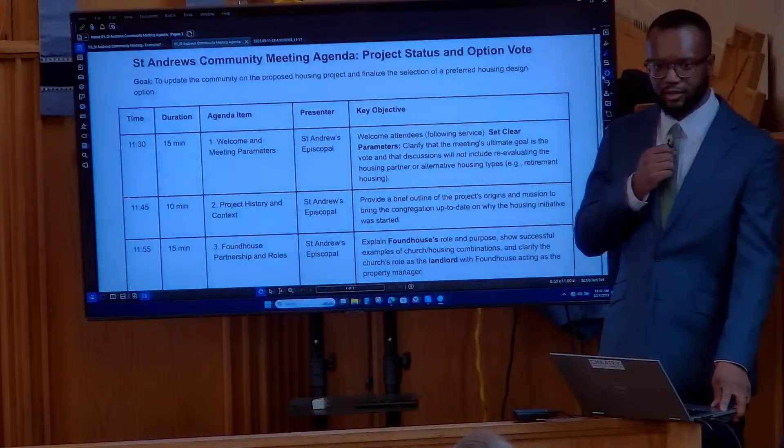So we won't go too much into detail on the buildings. If we want to talk pros and cons, I do have that list in a presentation format, so we can discuss that. But that's what we're trying to do here, drive this to a decision.

The next part of the agenda - it was really helpful when we discussed this with the vestry, and had a couple of people come visit who had some pretty significant questions. One thing that really helped was having a sense of the history of the project, because a lot went into it. About 3 or 4 years of work went into it before it even came to us.

So I'm just going to hit some of the highlights, you can read along. Many of you will remember that in 2014 the church tried to start a building project with DNK Architects. If you go into the library, you can still see the results - renderings of what the church was supposed to look like from that time. We also undertook a $300,000 capital campaign, which was supposed to be matched by the Diocese of Southern Ohio.

When I came to the church in 2019, during COVID, nobody else was here. I just came to the building because I'd never been here before. We had the graphic of a thermometer for the building campaign, and out of $300,000, I think it was at 28 or 29 thousand. Then COVID hit, so I thought, well, when we come back from being out from COVID, we don't need to see that.

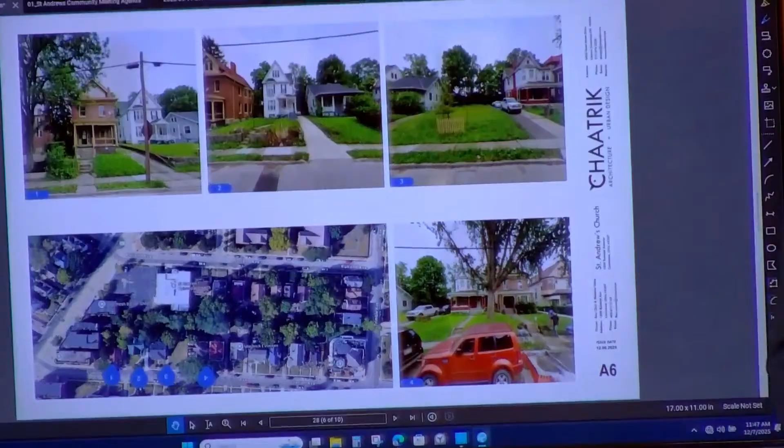In April 2025, Chaatrik gave us the renderings that you've seen in your papers. These are very basic renderings, and LeStavion is going to show you examples of what a more shovel-ready thing would look like. So if you look at them and think, that's not quite what I had in mind—no, we just want you to know it's going to get more detailed and evolve, so it won't look exactly like this. This is just to give us an idea of what a 2-building or 1-building build will look like.

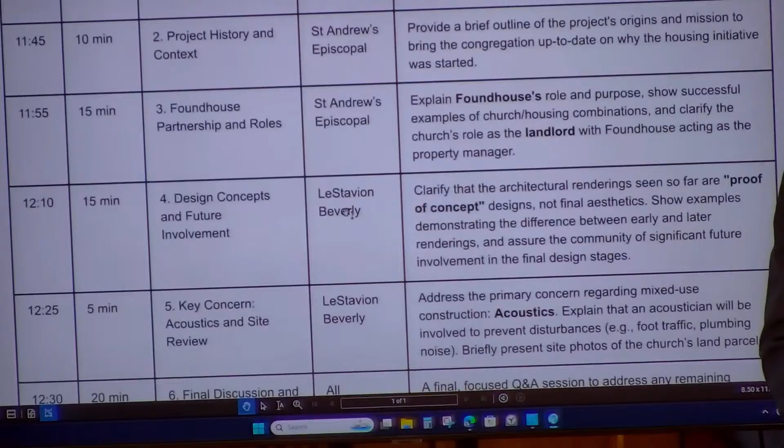I think it's also important to mention that Foundhouse is pretty respected by the city and the interfaith community for doing this. As Father Chris said earlier, they focus on really getting people out of homelessness. So any families going through issues, they work with them to find housing. I believe the data I looked at showed about an 82% rate of getting people out of temporary housing into permanent housing through their different programs. They have other programs as well to help people develop whatever they need to get permanent housing.

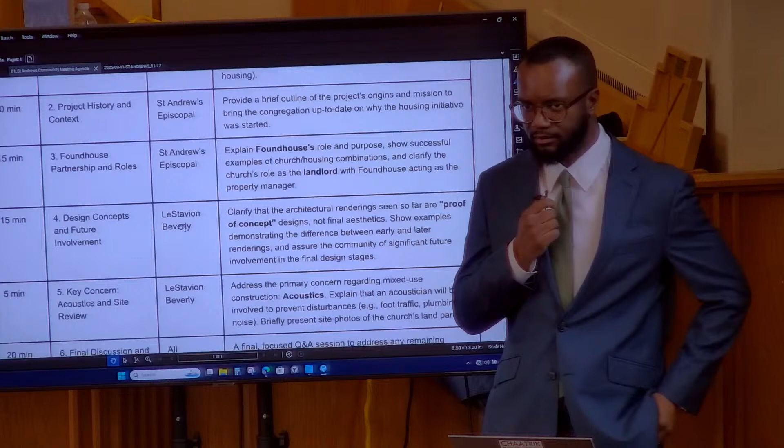Yeah, so they have wraparound services. Things that we do, like our Justice Hub and our after-school program, will fit great into that - we'll have kids living here who need those kinds of programs. So we're actually preparing the way for this new life that we're going into already.

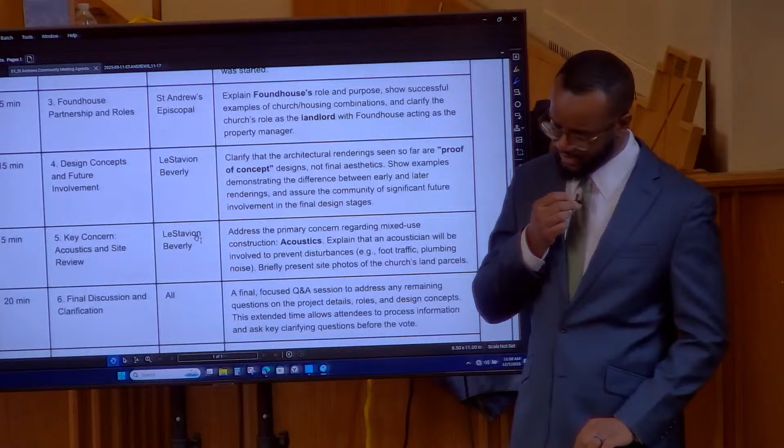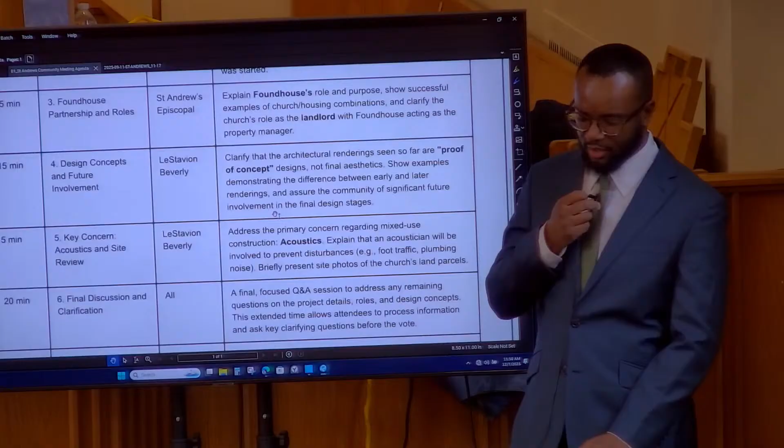As Father Chris said earlier, what we showed before were really proof of concepts. I didn't actually put the examples of renderings in here, but in this case we rendered a little early just so you guys could see proof of concept - that we could have a church and a building as one building, and it can still feel like a church, not like an apartment building or some commercial structure.

But as we develop the design, that's going to change. Currently we're in what's called a pre-design programming phase, where we're trying to understand the needs, get those needs on paper, see how big of a building that's going to require, and then from there start layering in a lot of the other details - what type of mechanical systems we're going to need, what the actual exterior material will be, what it's going to look like on the inside.

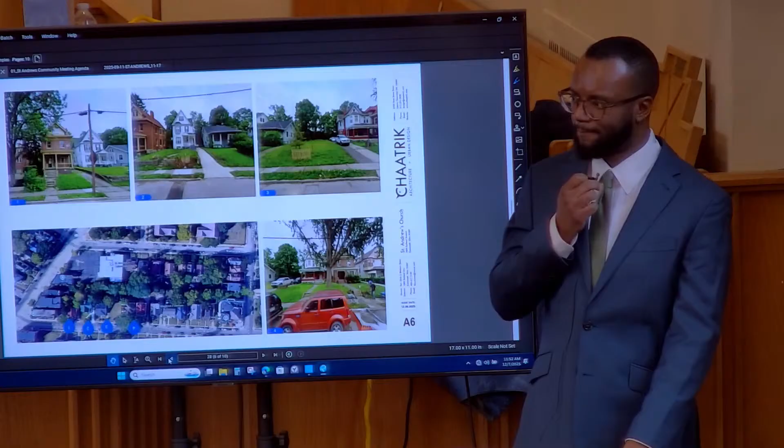In order to get to that next stage, as I was saying earlier, the real first step is to make sure we have full buy-in and approval from Cincinnati's Community Development Zoning Department. That's really the big hurdle we're trying to get past now. Once we get through that piece is really when we'll design more touch points with you all into the process, so you're engaged and don't feel like we're moving ahead without you or making decisions without you.

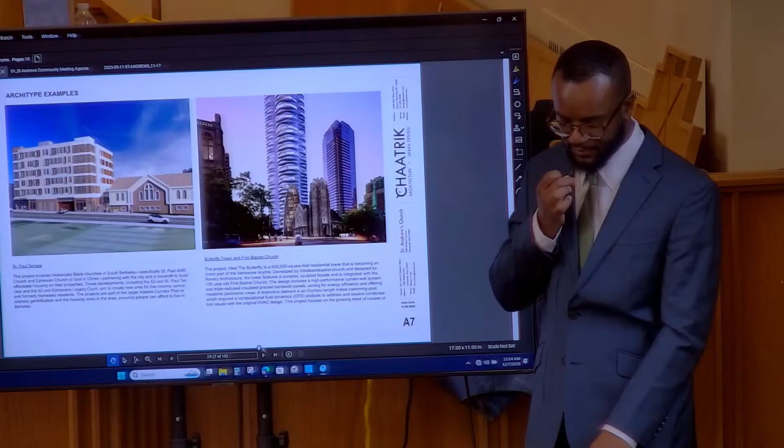A few others—there's a group called the Damascus International Fellowship who have been working with different universities, developing projects along the same idea, experimenting in colleges. So this is one of the students' projects.

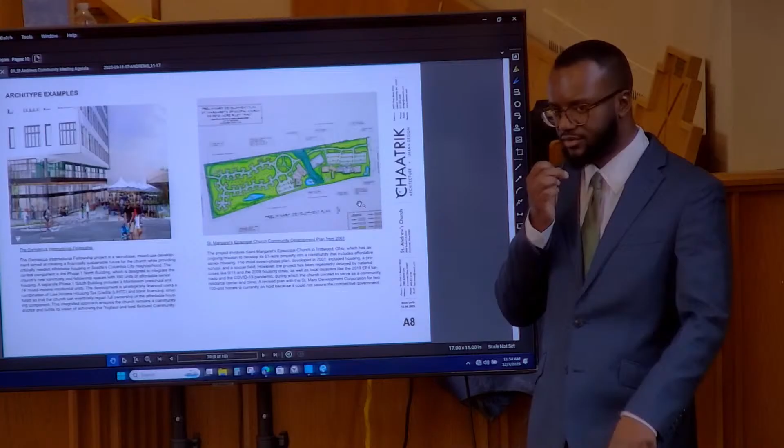And then there's a church—this is St. Margaret's Episcopal in Trotwood, Ohio. Back in 2001, they were looking to build a lot of senior housing on their property, and this was the plan for their development.

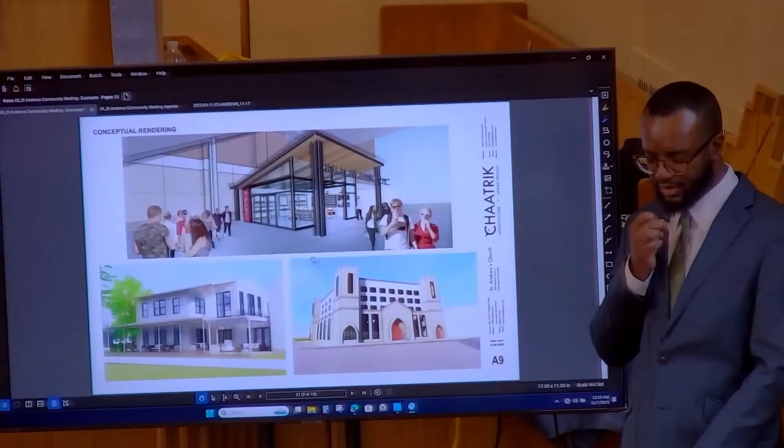So a lot of folks are really looking into this, and these are examples of renderings. This is all conceptual—hey, we don't exactly know what we're going to do yet, but here's an idea. But toward the end you can expect things that start to look a lot more photoreal, like the renderings of what we've done for hotels and homes.

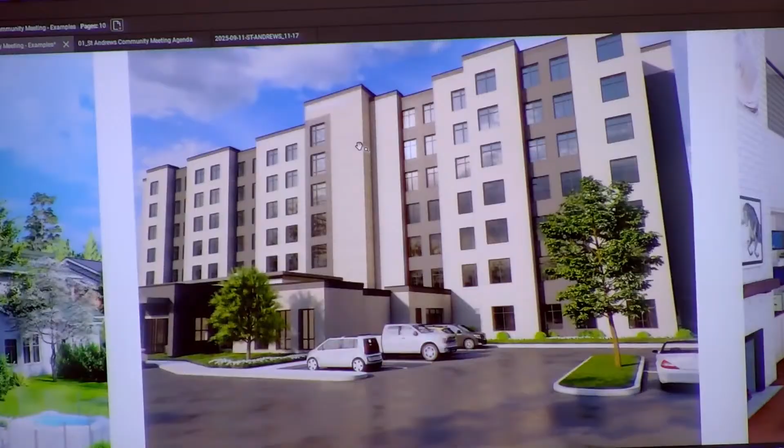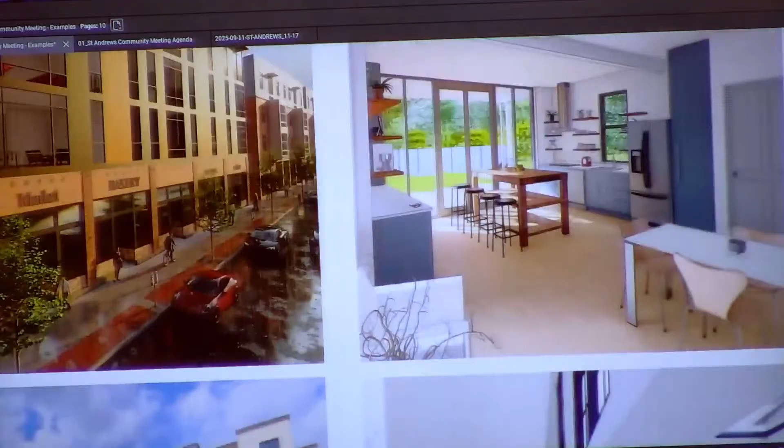I'm going to zoom in so you guys can see them—more hotels. These are all different projects that we've designed and rendered. When you start to see things that look like this is when you'll know we're really getting closer to the finish line.

So before I move on, are there any questions about the concept or where we are in the design process right now? Yes, you in the back first, ma'am. Hi, I'm Ann. Hi, nice to meet you.

So is there—affordability-wise, which way is it cheaper to build, two buildings or one? Which way is more sustainable financially, where does it become more energy efficient, two buildings or one? So one building will be more energy efficient.

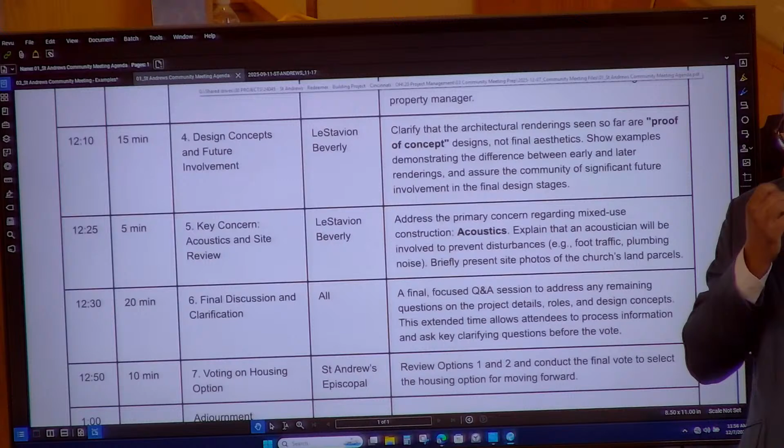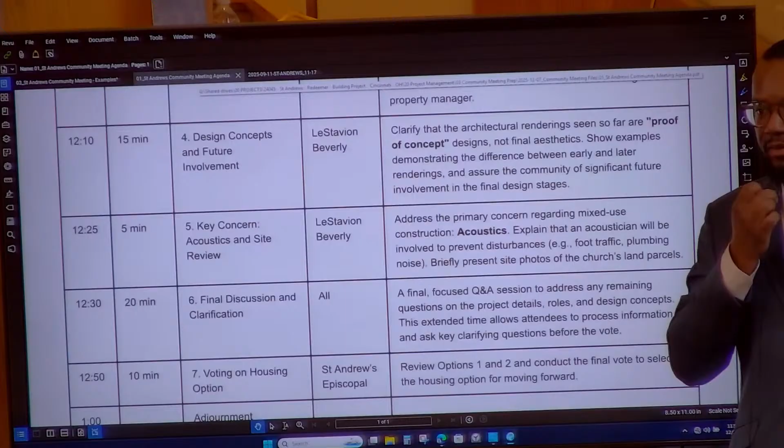Model Group actually did a preliminary cost analysis of this, and they said you'd save about 5% of your budget if you go with one building, which for a project of this scale is around $1.5 million. So the number I gave was the savings amount—about 5%.

So in terms of efficiency, one building is the way to go because you can more centralize utilities. You can have a smaller envelope, so exterior walls cost money, and making sure they're insulated costs money. If you have two buildings, you've got a lot more wall to build. So one structure is a lot more efficient.

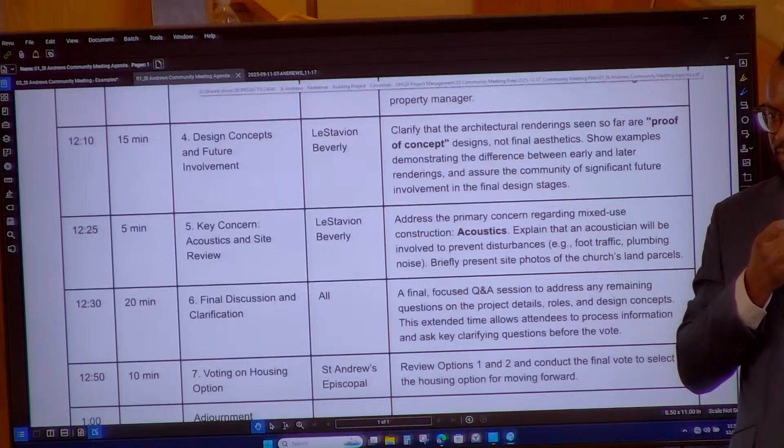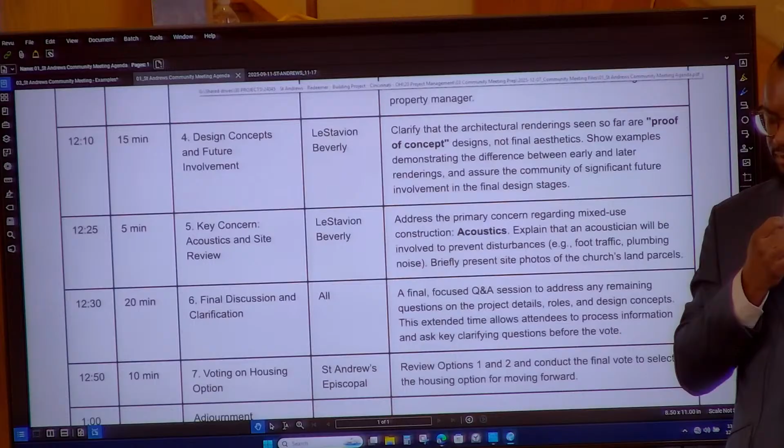Yes, was that you, sir? Yeah, I wanted to know what information you had about the scope of possibilities for the occupants of the housing and the users of the church facility—in other words, how many people would live in the housing, and how many would the church facility accommodate at 10 o'clock on Sunday morning?

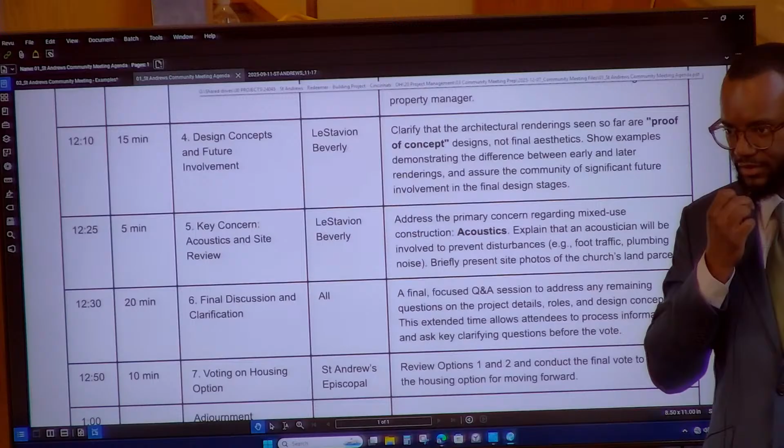Great question. For the apartments, we're targeting 37 to 39 units of low-income housing, spread out between 3-, 2-, and 1-bedroom units. In terms of the size of the church and how many people it can seat, I think we were—was it 200 at one point?

Let me go to the program, I've got this written down. One sec. So we were targeting a parish hall, community space, worship space, about 2,000 square feet. That's about enough for about 200 people in the worship space.

Yes. So, Father Chris, when was the last time 200 people were using this facility? That's a good question. We'll get a little bit over 100 for funerals sometimes.

But we don't want the space to be too small, because then you can't grow. So the plan is to grow. Will we grow to 200 a Sunday? I mean, that'd be great, wouldn't it?

I'm not sure what this space would do. At least 175, I would guess. We're talking about a space that'll be roughly this size, I think. It might be a little smaller, but also when we're talking about interior spaces, we'll have to make decisions.

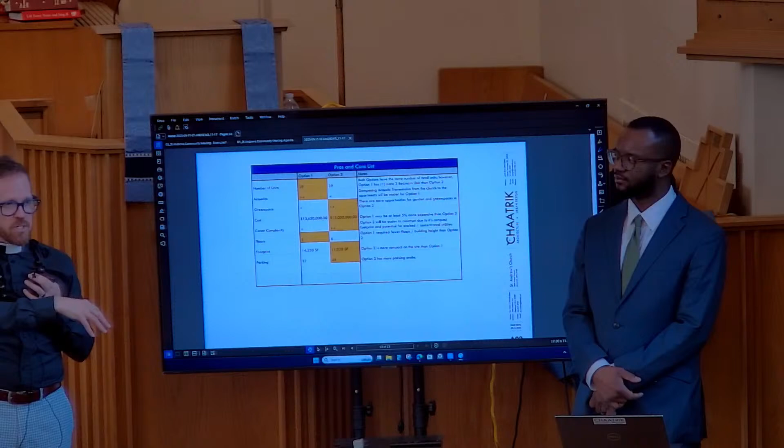We'll just let Cincinnati police know this is the new arrangement, because the city is making us build on the corner. There's no option to build back here and keep the parking lot — the city wants the buildings on the corner. It's part of their development plan for the Northern Business District, so that was one of their stipulations.

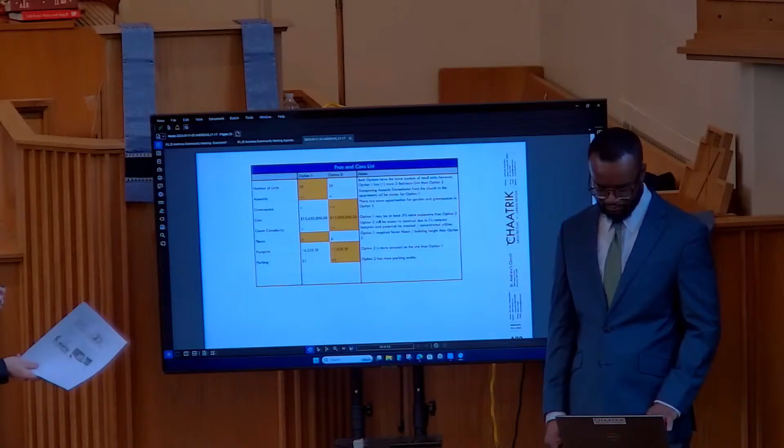Yeah, so you have them here, and I think LeStavion, you have it up — yeah, there you go.

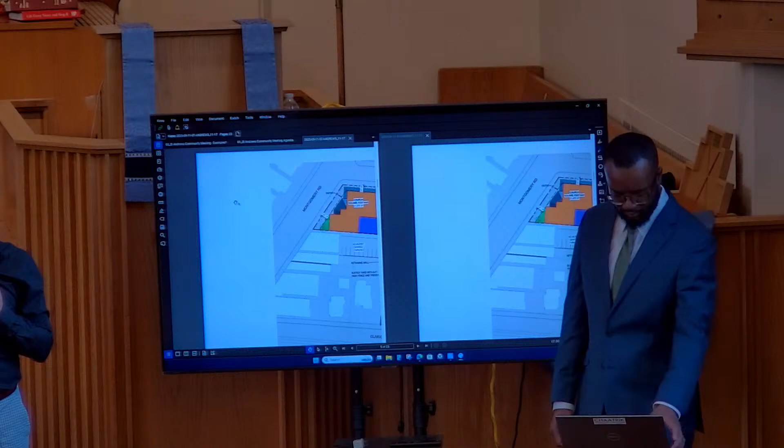Mary Carol, you have some questions? I think it's kind of answered, but I'm not positive — the environmental questions about green space on the roof, and LEED, all those kinds of things. Mr. LeStavion, can you address environmental concerns and the potential for either play space or green space on top? Gardening, family gardening was what I was thinking about — tomato plants and stuff.

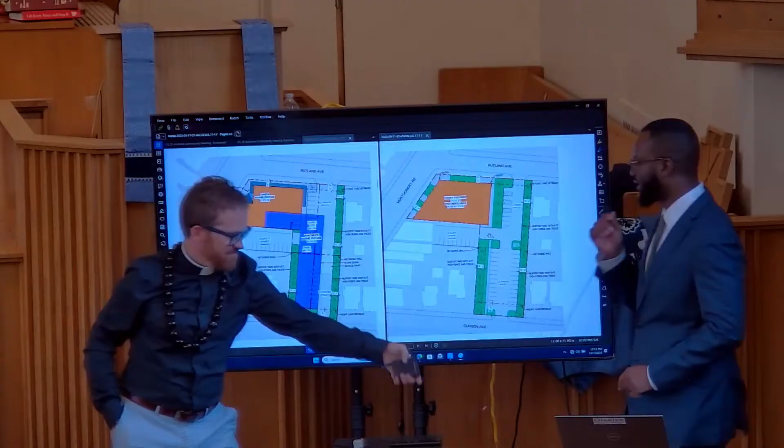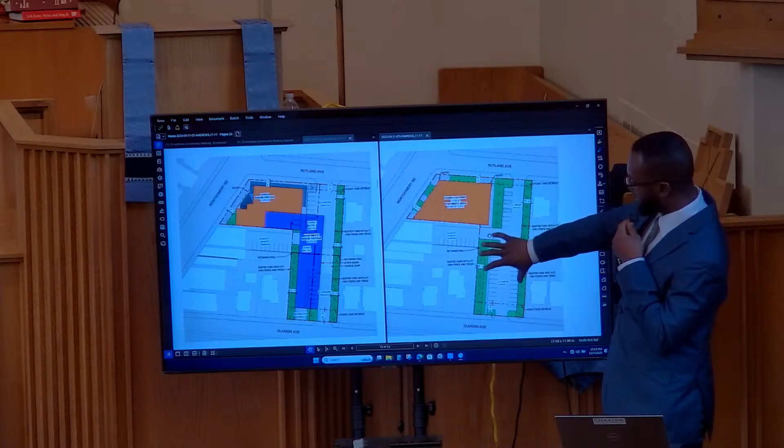So here are the two options, and I can address both of y'all's questions here. Option 1 has two buildings with 30-something parking spaces, option 2 has one building with 50 parking spaces. Option 2 does have a lot more greenery on site. If there are spots you wanted to have gardens, whether along the rear of the building or along this part, those are the opportunities — that's really the green space we have around the parking lot, plus a few green spaces along the street as well.

Are you guys looking for more green space for that type of use? My concern was how are we gonna make use of the green space — are we gonna have solar panels up there? Solar panels can even be above gardens if they're high enough to get enough sun, if it's not solid solar panels but there's spaces. I wanted to see how the roofs are being used — ecologically concerned, gotcha.

There's some people at Redeemer who have asked similar questions. We have not gotten to the point where we've figured out the exact roof system, whether that's going to be some type of green roof, and we haven't figured out exactly where all the plantings are going — but that's what this meeting's for, to capture these concerns and questions. The use of that space is one, the ecological use — you want to make sure the top of the building isn't just a flat space that's not doing anything, like we have today.

So I do have a question — this may be a curveball. We have this beautiful basement downstairs. Is there any way to preserve that area for access, for storage, and other activities? Since the parking lot will be above it, is there a way — I know it's a curveball, you don't have to answer today — but if there's a way to preserve that underground space since it's already there, it could facilitate our use for storage, especially for the pantry. Especially since the church has only got surface level access, and there really isn't available space.

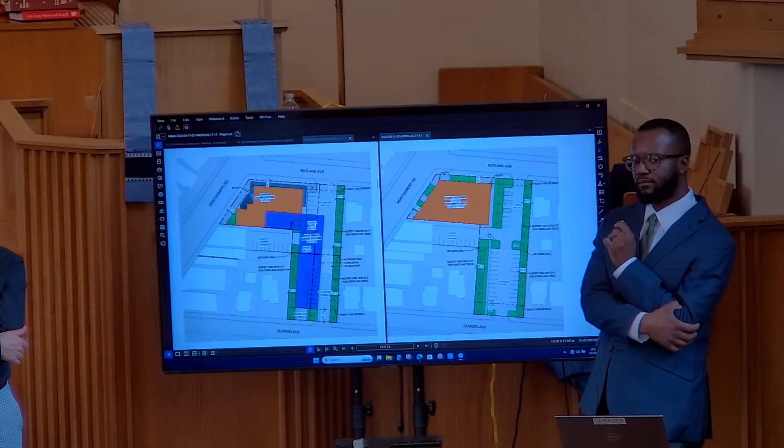I wouldn't do that, because since it's gonna be a parking lot above it, you're gonna have to invest a good bit of money just to rebuild a roof above it that can support however many cars fit above that basement space. Now, we are planning separate storage specifically for the food pantry area. So if there are other storage needs we have, let's hear them now so we can bake it into the floor plans when we get into the detailed design.

Yes, that's going to be critical. You can go downstairs and see what, that's our school. I don't know if the school can actually be held in the same space as the worship area.

We have classroom spaces in the program, we have community spaces in the program, we have a parish hall in the program. So a lot of those spaces are just coming out of the basement, so they'll either be on the ground floor or the second floor of the church.

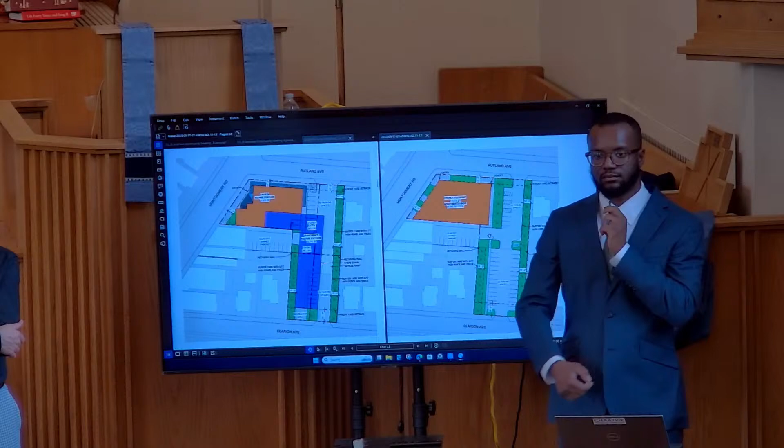Just when you're doing dimensions, rethink about that when we get to it, because if there was a way to preserve that—imagine, from that wall to this wall, is all one. And so now we're going to be driving across that, so if there was a way to preserve it, that would be something to think about. It'd be a challenge architecturally, but it could be done.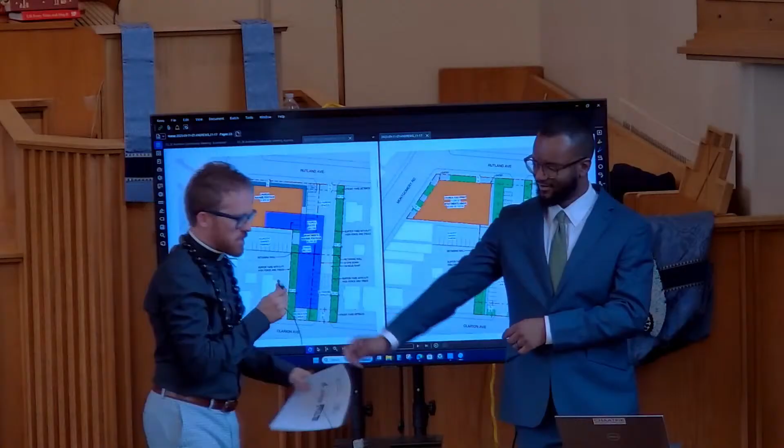Yeah, that's a good point, that we do need those spaces. So if you look at the one building option, I feel like this space right here that we have is about half that building. Which means the other half, instead of having it below us, it would just be next to it. So it'd be like having the basement space here.

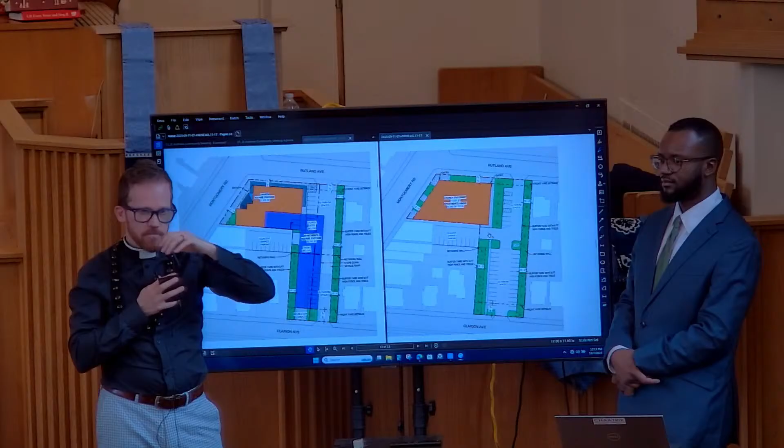Isn't there also a second floor? There's a second floor with offices and things like that, yeah. So the only thing that doesn't have a second floor is the worship space, because we want the worship space to be two stories high, since we like the tall ceilings. So it'll be two stories on this half, and then all of the parish hall space.

We based the numbers I gave for square footage on the DNK design that was made 14 years ago. So all those spaces that were part of that building were kind of the basic idea of the space the church needed, and that's what we based the square footage idea on.

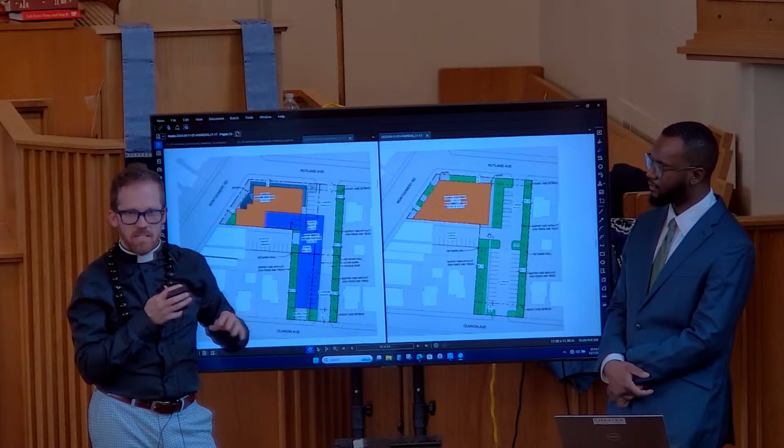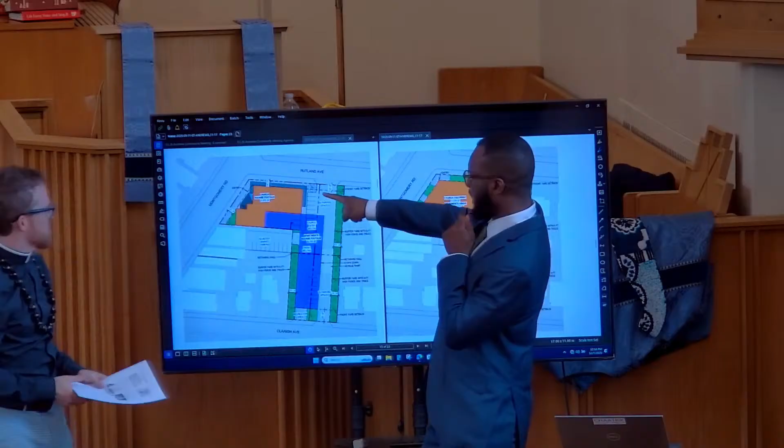It's underneath the building. There's about 8 spaces here, there's a shared parking lot. His question was, where's the parking on option 1? Option 1 has about 8 spaces right here in front of the building, another 9 spaces here, and then the rest are in that shared parking area.

A lot of that just gets cut into because we've got this giant building taking up a lot of that area. None of it's underground, but the building hangs over some of it.

Both options have the same number of housing units? Yes, they have the same number of units. She asked if both options have the same number of housing units—they both have the same number, although there's a slightly different mix, like this many 2-bedroom versus 3-bedroom.

The buildings we currently own on Clarion, do you want those out of them? Yeah, they'd be here and here. So this is an empty lot, and this is where the house is.

Would it be possible to have solar panels, if there were solar panels, over the parking lot, and free up the roof for a green roof and a community garden? Yes, that's possible.

Whether we do a green roof, a solar roof, or a normal roof, it really is going to be budget dependent because those systems require a level of investment. There are systems that have kind of shading—if you've been to the Cincinnati Zoo, they have solar panels that shade the parking lot, and like you said, you can put it on the roof.

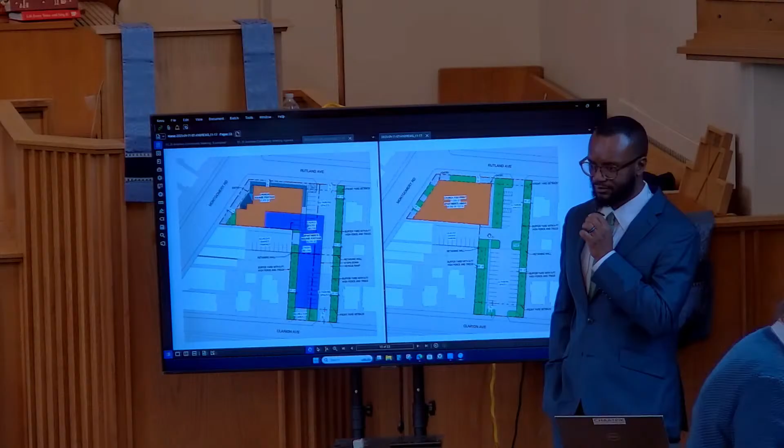Can you, to the extent possible, right now dimensionalize what you specified—that the division between the housing units and the church would be a little greater with option 1.

For option 2, can you just help me understand what that separation looks like? How does that work? Do they have a separate entrance? How does that whole thing work?

Yes, so in both options we would separate the entries for the different uses. The church would have a separate entrance, probably one at the front and one at the back. The apartments would mainly have one main entry at the back of the building, but they'd also need additional stairwells for emergency exiting in case of a fire.

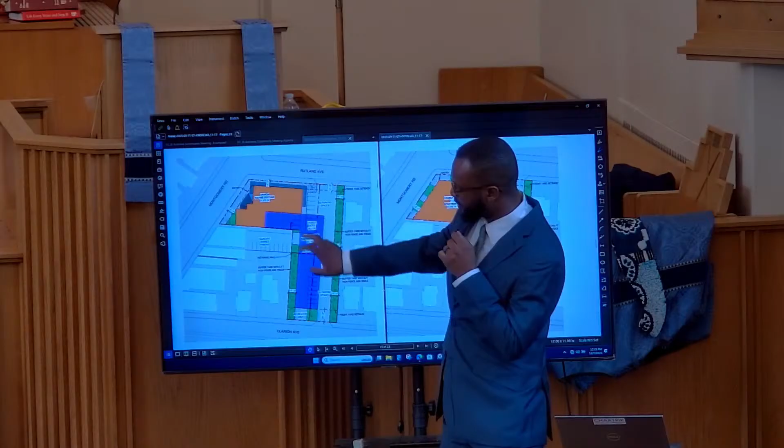In terms of the separation between the church and apartments, for option 1 it's really just space. We have a few areas that overlap, but most of it is separated because they aren't in proximity. For option 2, it's really going to be a specially designed floor system that separates the church from the apartments above.

That's for acoustics and things, all the stuff I was saying before about needing to design a special floor so you don't get all that sound.

I'm sorry, sir, she's had her hand up a few times.

Well, so just two things, and they're not related to one building versus two. I'm from another part of the country and I've been affiliated with projects like this tangentially. The one building option has worked great in every experience I've had.

The thing that could happen for us, and I think part of what we have to be careful about in our conversations, is that if we really want to open ourselves up to the community, maybe part of the design is that some of our parish hall space becomes a space that can be jointly used, by the residents if they want to have a residents meeting or something. There should be a level of sharedness about the space. I think that's really critical for us instead of having proprietary space. We need to be willing to share our space with the people who live in that building in appropriate ways.

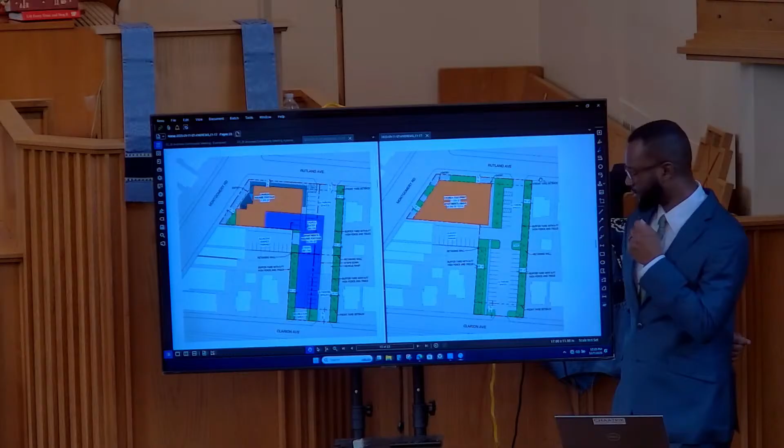In safe church ways, but also just in terms of, you know, if somebody wants to have a gathering, not because we are cranky people, but you know what I'm saying, we figure out a way to share that space. So I think that's really, really important for us to consider in the design of the building.

The second thing I just want to say to you all: I lived in a mixed-use building for 4 years, and it was low-income housing. The first floor was businesses, it was a high-rise, and the diocese had its offices in there. Floors 2 through 16 were Section 8 housing, floors 17 through 21 were luxury apartments, and I lived in 19. Totally separate entrances, the office for the building was between the two of us.

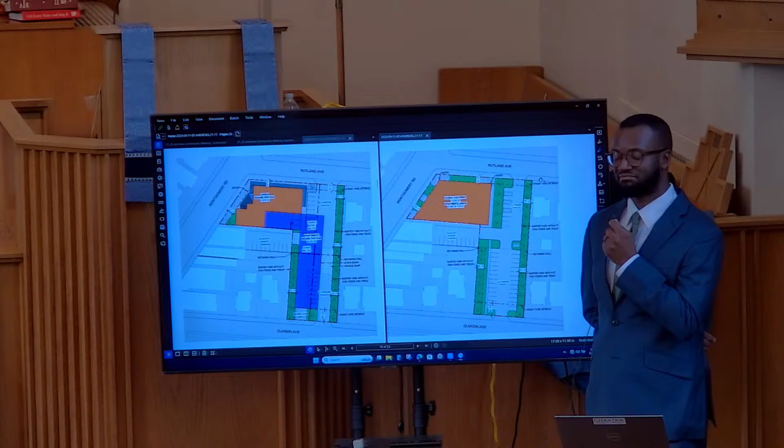We had 2 separate lobbies, and the design worked great. The only time we were stunned was when we moved in, and on the 4th of July, one of the neighbors from the Section 8 housing stood out on a balcony with our windows open and let loose the Star Spangled Banner at the top of her voice at 6 o'clock in the morning, with a few expletives to go with it. So that's the extent of the interaction. I literally had to walk around the building to even encounter people who lived downstairs.

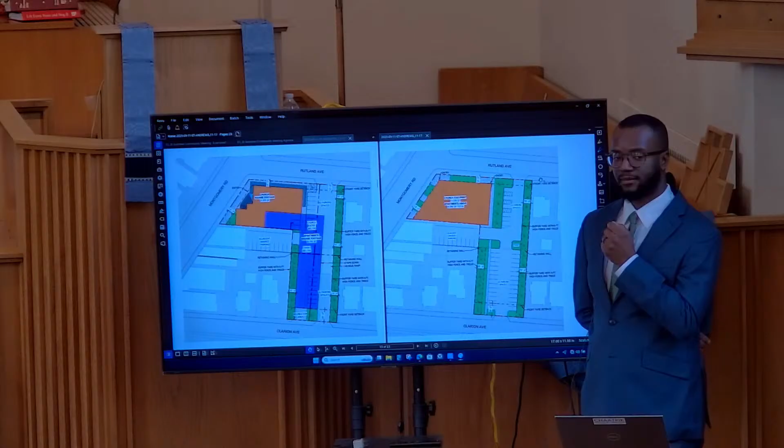I know there are places, like in Walnut Hills, is the low-income housing more of a permanent thing, or is it like they usually do in the other building where it's temporary, and then they're working with the city for them to get Section 8?

So we've met with Stacy last week. Some of it depends on what they do with HUD. It does turn into being more permanent-ish, because it's hard for them to get out of it. Our plan is to do permanent supportive housing, which usually looks like people staying for about 2 years until they get their feet under them. So it's really about building sustainability.

So that's the plan. Unfortunately, as with a lot of things with this administration, the best way to do things isn't always the way they want to do it. The scientifically proven best ways don't always turn out to be the ones they want to do. Permanent supportive housing is actually usually the more successful way, having people stable for 2 years so they can build up savings to do first and last month's rent and move out on their own.

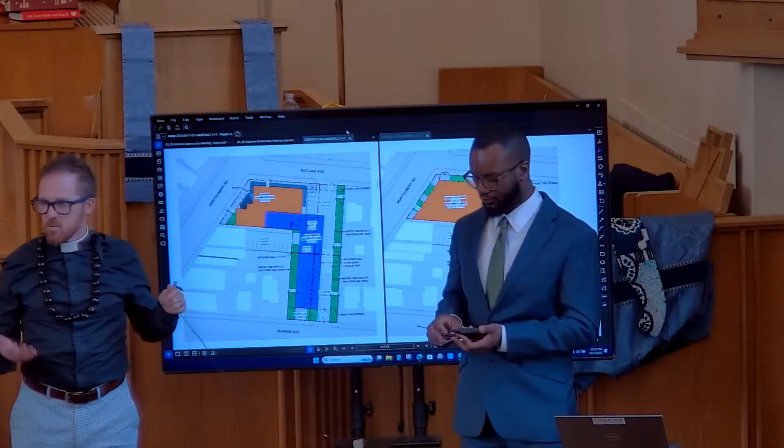And I guess we can talk about if that's the way you guys can see yourself working with the space in the future. Appliances, I think, we'll figure out pretty easily. But yeah, we'd share all the space.

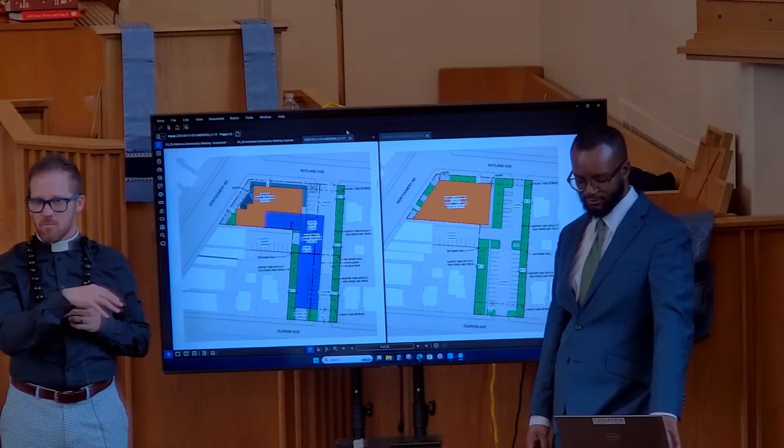So one of the great things about either of these options is that we asked Lastavion to make sure that the people who are waiting for the pantry will be able to wait inside, and that there will be enough pantry space so that they're not having to use that room and downstairs rooms and closets. That it would be a pantry built for the pantry, and the kitchen built to actually cook in - well, we'll have to get all the appliances, but yes, a kitchen that would be usable and freezer space that would be usable.

So in future meetings, what I'd want to do is sit down with you all, look at the space that you currently use, and really dive into what the pain points are, what you hate, what you love about it, so that we can incorporate that into the design. If you don't like the style, if you need a dishwasher, we can talk about what type you need. If you need a different type of oven, if you need to go more commercial with your equipment, we can have those conversations and pull together the equipment list that'll get you the space to serve effectively.

We haven't gotten that far with the contractor yet. We just set budgets at this point. It'll likely be a few years if I had to guess, it's a complicated structure. In terms of the difference between the two options, is it all about the same, or is one another 6 months to a year longer than the other? It'd probably be longer to build option one, especially with all that exterior wall. By how much, I don't know.

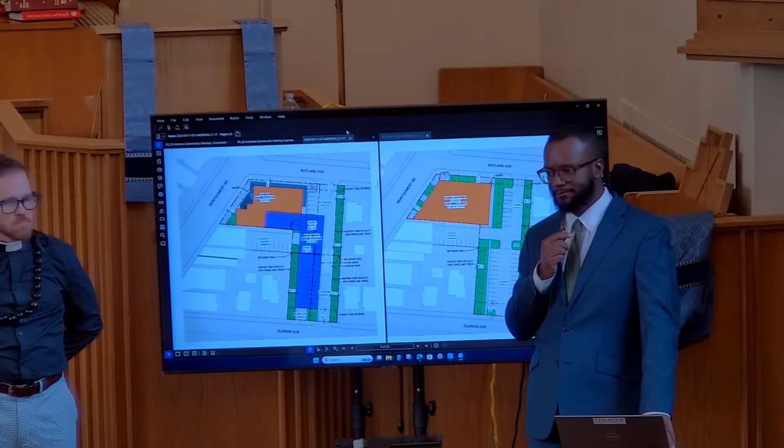Are there any other questions? Yeah, Vincent - Found House have to raise their own funds, isn't that separate? Yeah, budget, yeah, not related to the church budget. So when we talk about two separate buildings or one building, it does make a difference as to how all of this can take place. How can you do a combined building with two entities raising funds? Whereas I understood the separate building option, it was possible for us to build a church and then Found House would be working on their part, it didn't have to happen at the same time.

That's probably not true, because I know there's joint - yeah, some things that are going on. But it's still - I want people to understand about the funding, that there's two portions of this funding that have to come together for this project to move ahead. That's right. So Found House will be funding the housing, and we and our church partners will be funding the church.

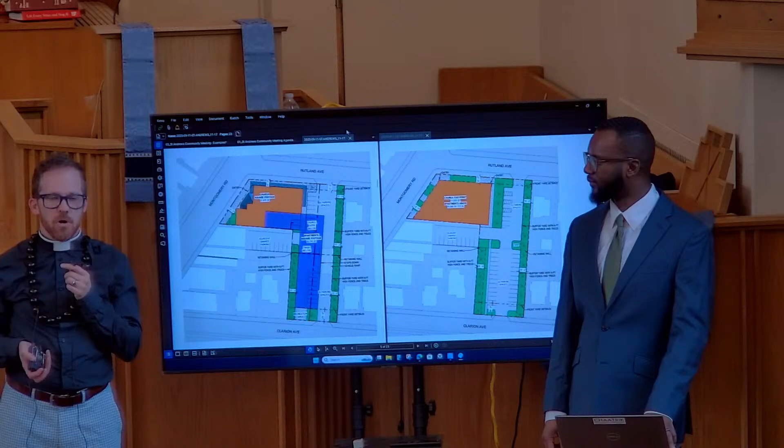We actually are dealing with that a little bit with the city, because the pre-development funds - since they have a separation of church and state - we have to work with them so that the funds they're giving us are not used on church stuff. So they're going to have to give us some sort of percentage or something, and we'll get a matching grant or something like that to do the rest.

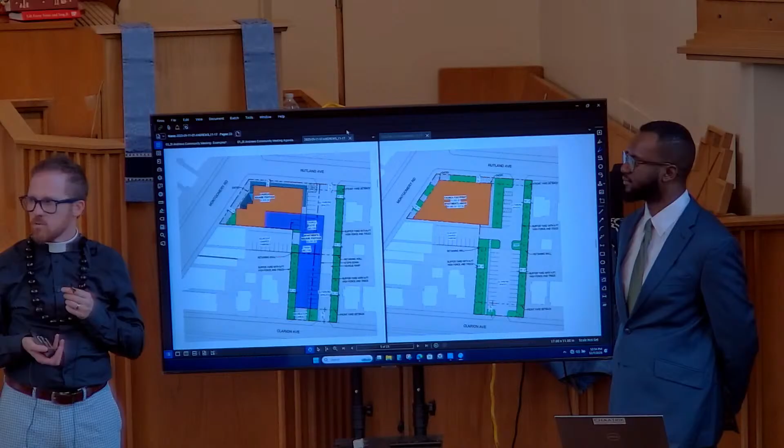But yeah, they'll be technically separate, but we haven't looked at all into how we're going to bring in a development corporation - Found House already is a 501c3, and they already have kind of those stable accounts for these kind of capital things. That's something we'll have to work out with the chancellor of the diocese and with the lawyers from Found House, but that's something we have to work out, and we'll have to work it out sooner rather than later, because we're about to get $85,000 to put somewhere.

I think it's also fair to say that without the new community housing, there's not a new church. Correct. That's correct. Yes. Yep.

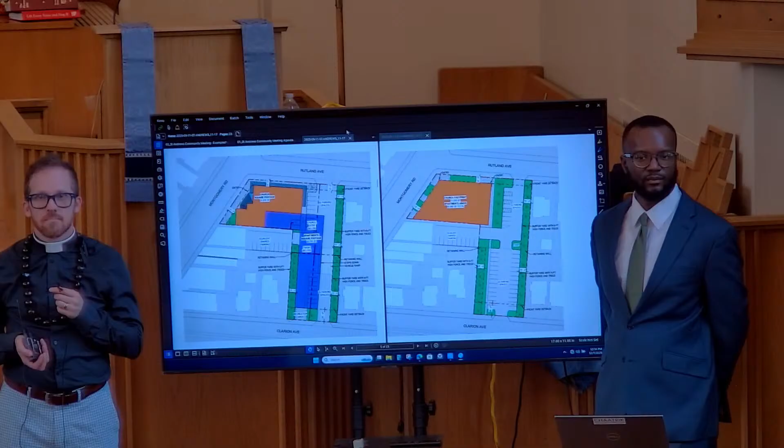Hey, so can we give the architect a big hand? Yeah, this is the architect.

So the question is, do we feel comfortable that we would be able to vote on one of the options? Yes. And then, so I think what we should do is - well, we already know the Post said that they prefer option 2, but we'll do a hand count. Is that okay? And then I'll also have Mrs. Harris send out a thing to the people who weren't here, by email, so that if people want to vote by email, they can. Does that sound fair? All right.

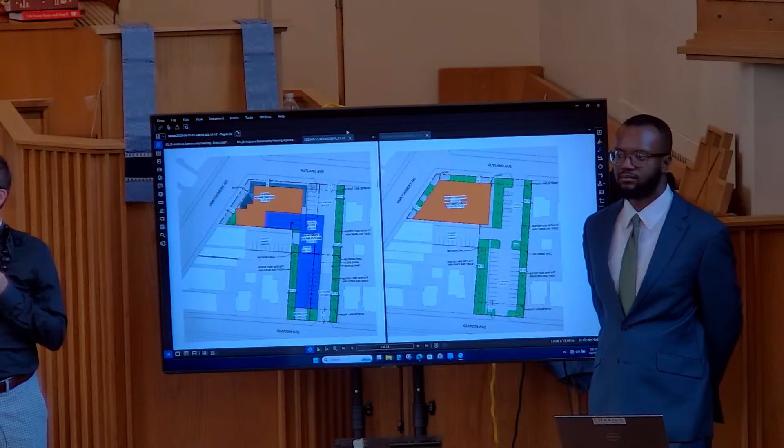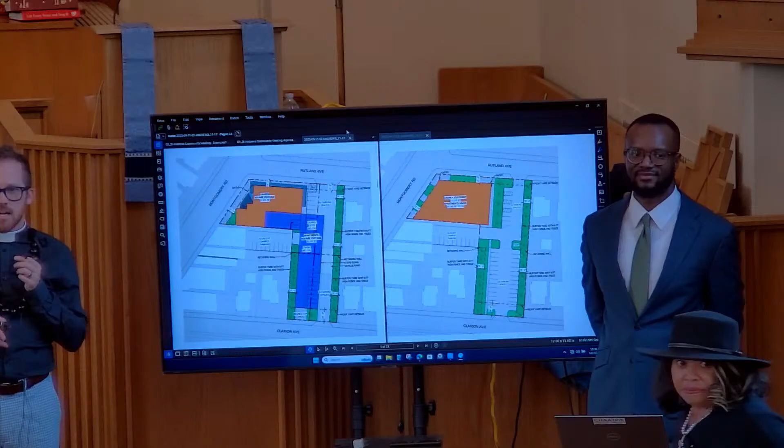So can we get - if you prefer the 2 building option, will you raise your hand? Okay. If you prefer the 1 building option, would you raise your hand? Okay, let's count. So what are you? You're abstaining. 1, 2, 3, 4, 5, 6, 7, 8, 9, 10, 11, 12, 13, 14, 15, 16, 17 here, and who's abstaining? 18, sorry. And then Mary Carol's abstaining. Okay, alright, so it was pretty much unanimous.

We will reach out to the folks who aren't here, so that they can have their voices heard. Will you be able to repeat everything for them? Well, I will ask if they have any questions. And we'll send this out - this is going to be on our YouTube channel right now, so if they're really curious - hi, for those of you watching.

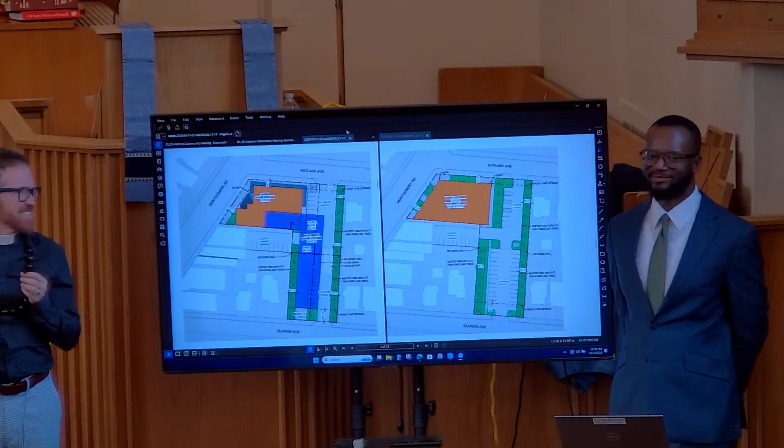The Lord bless you and keep you, make his face to shine upon you, and be merciful unto you. Amen.